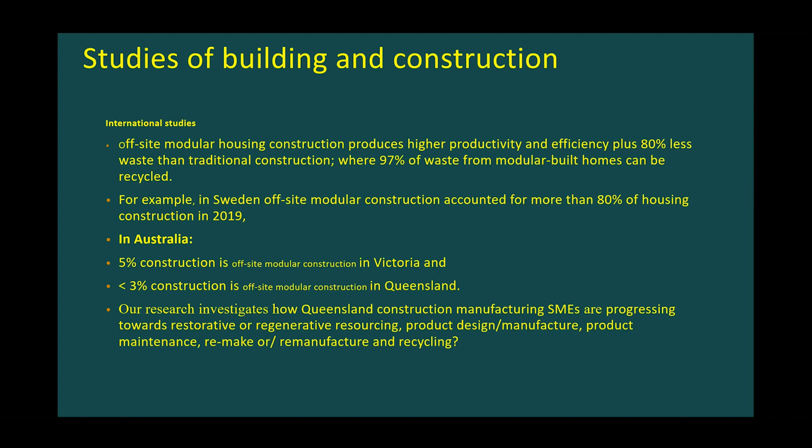So we're interested in knowing what's actually happening around our part of the world with small and medium enterprises. How are they moving towards some sort of restorative resourcing, some sort of product design, manufacture, product maintenance, but also to reduce the landfill contributions coming from construction and demolition.

So then, with that in mind, what might circular economy initiatives look like in building and construction? I went back to the work of the Ellen MacArthur Foundation, who really looks a bit beyond what's there.

To think of a circular economy, we need to not just get rid of waste, we need to design out waste from the beginning, not just look at the end products. Let's design processes so that waste is minimal, so we can keep products and materials in use as long as possible, and develop ways of regenerating natural systems, because there's a finite amount of natural resources. Unless we have a process that not only reduces and recycles or upcycles them, but somehow regenerates them, we're not going to make any progress.

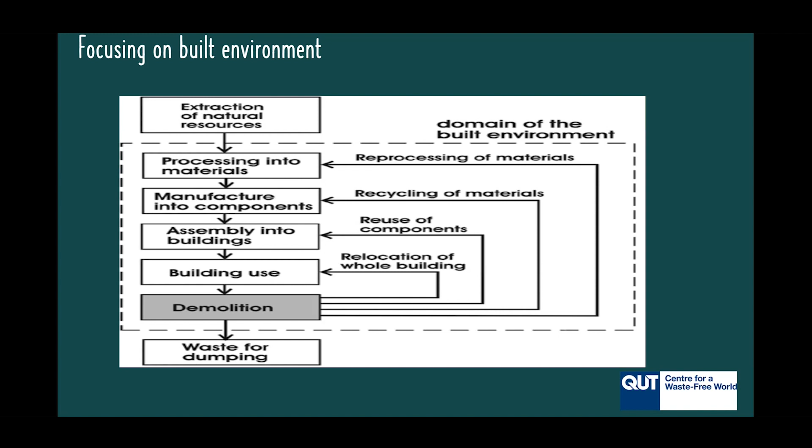This is actually a very short presentation. I've taken out a lot of material because I wanted to keep to the time frame we had set. There are different processes of building and designing for disassembly, so that when products are made and assembled, they can actually be disassembled without too much cost. I haven't gone into those, as I've been trying to keep my presentation quite focused.

So what is happening in off-site modular construction? In Australia, we were settled by colonists who transported materials, sometimes whole buildings already assembled or in flat packs so they could be constructed. It wasn't much the stick construction you might see driving around the suburbs with new buildings going up - just the opposite. It was already designed and cut to size, and some of these original houses are still around, particularly around South Australia and Ipswich, out of the metropolitan area.

Given this history of modular construction, what's been happening in the last 20 to 30 years? You may be familiar with, and unfortunately there's a whole understanding and perception about the dongas happening in WA with these really basic processes. We're not looking at dongas - I'm really looking at some quality construction.

You may have seen this in new schools being developed, an example on the right there. Similar small houses are being developed, often used out west. There are also some very large organisations - the case study this comes from is a large national construction company, Queensland based.

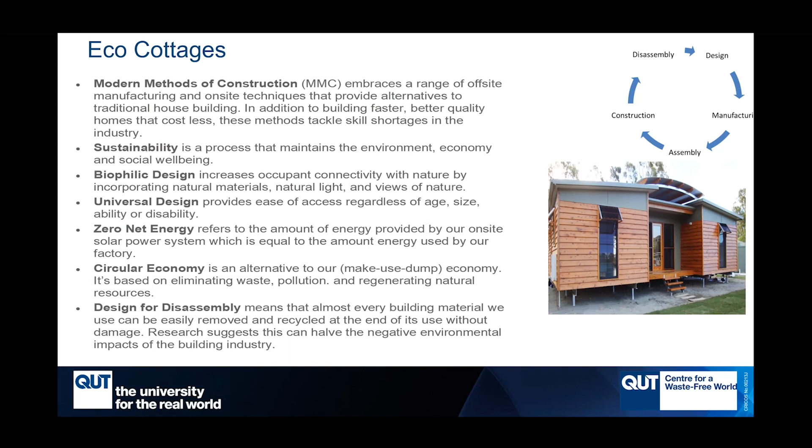There's a very short video here, which I'd like to show.

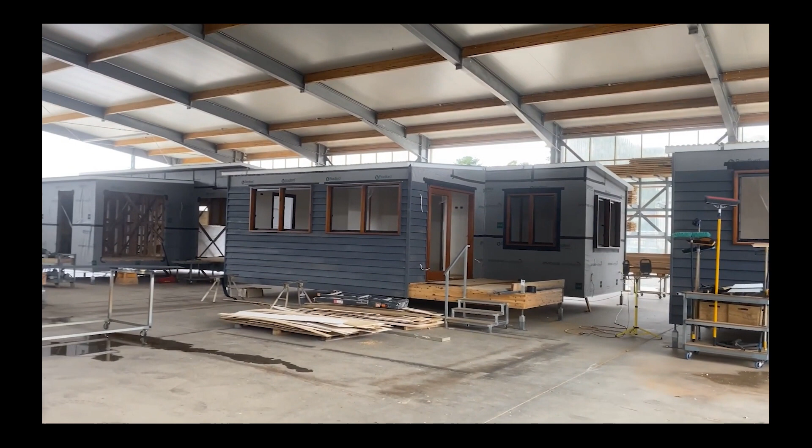We established Eco Cottages in 2007 in Pomona, and we started manufacturing small modular homes. Our broad market was for those wanting to downsize, clients wanting accommodation for ageing parents, or parents wanting accommodation for the kids, Airbnb, tourism product, and rentals.

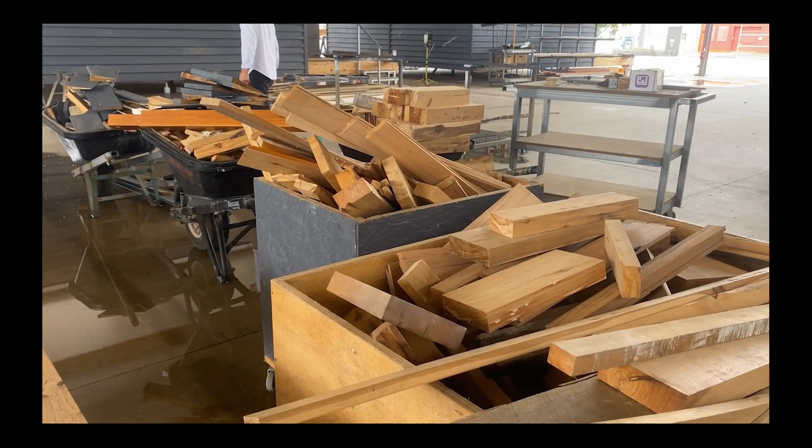The key aspect of setting up our business and growing it was through the development of a really genuine, sustainable product, because the majority of people that live in Noosa Shire and hinterland are environmentally conscious.

What really surprised me about doing business and growing our business in the Noosa region was that our business was really growing and we didn't have to advertise.

We outgrew our first two premises, the first one after 5 years and the next one in the next 5 years. The challenge we faced was finding a block of land we could afford to build a purpose-built facility on. Luckily, this site came up for tender through the council, and our tender was successful, which enabled us to set up a purpose-built solar power facility.

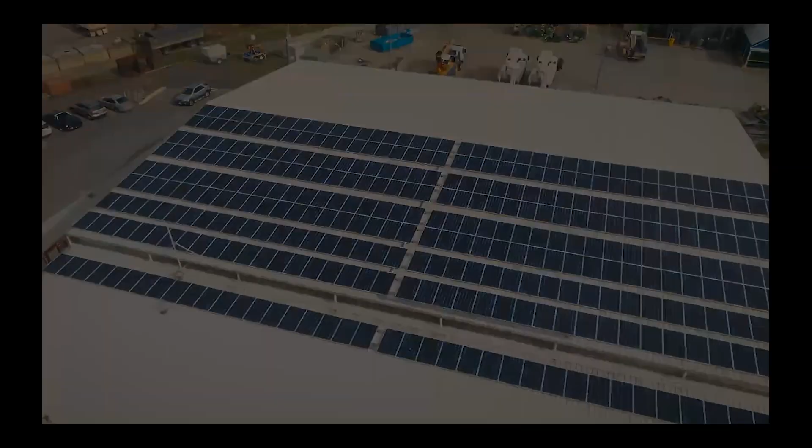If you're thinking about starting a business in Noosa, I'd recommend focusing on developing a really genuine, sustainable product and service. Consider leasing instead of purchasing land, because it gives you more resources to invest in plant equipment, skill development and services.

We've future-proofed our business through developing a really strong collaborative relationship with Noosa District State High School through apprenticeship development and workplace training. We've negotiated a really long lease with the Noosa Shire Council, and we've also developed a succession plan for our current managers to take over the business at no cost to them.

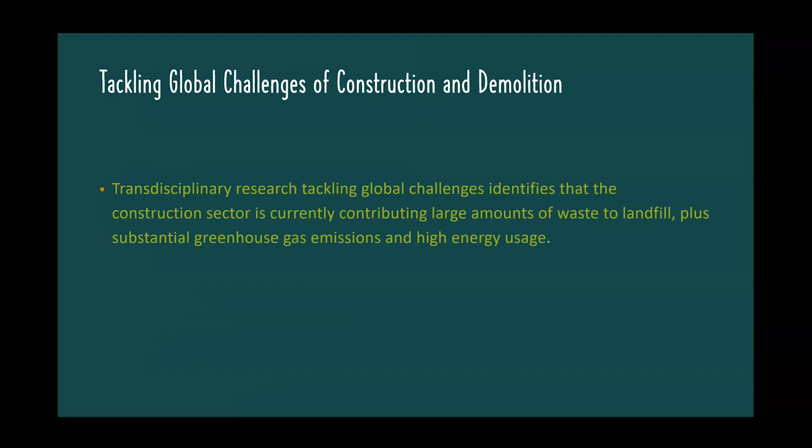They're now training people. They've got a whole training cubicle, a training emphasis in this new prefab construction. In the meantime, I'm not sure if you can see my slides, but I was going to add some more detail, though I'll be out of time.

An Indigenous foundation in Bundaberg approached Eco Cottages about forming some sort of venture, and a joint venture has been established. No money changes hands, but the apprentices are being trained at Eco Cottages or outside, and the managers go up to Bundaberg to help transfer this into the local area. The man who set up this company in 2007 isn't interested in growth or expansion, but he's quite happy to share, so in some ways it's a bottom-up expansion process.